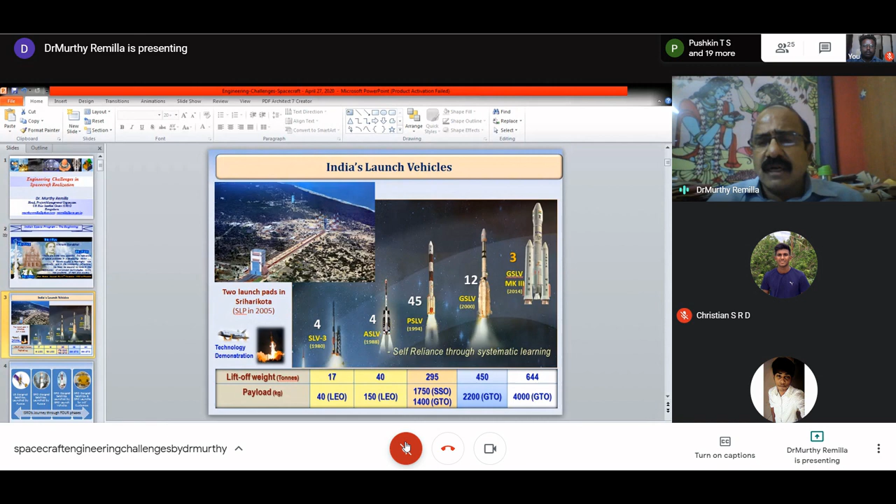Okay, then the initial slides I will go through quickly. As you are aware, there are different types of rockets for India. We initially started with a sounding rocket, then SLV, satellite launch vehicle, then augmented satellite launch vehicle, ASLV, subsequently PSLV, which most of you in the current generation are totally aware of, a very successful launch vehicle, the polar satellite launch vehicle, and then GSLV, the geosynchronous satellite launch vehicle, and the higher version of this is the GSLV Mark III, meant for carrying higher payloads to space.

If you briefly see all of ISRO's journey in one slide, initially we had the requirement of satellites and the requirement of launching them, but we didn't have either. So we made US-designed satellites and launched them using Russia. In the second phase, ISRO designed our own satellites but still launched them using Russia, because we didn't have a rocket at that time.

After that, we launched our own satellites made by us and launched by us — that is self-sufficiency. Subsequently, we started commercial operations where ISRO designed satellites and also launched satellites of other countries. We have launched more than 44 satellites for foreign countries so far using PSLV. So the initial program developed from the 1970s to beyond 2000.

Hello, yes sir, yes sir. Continue, continue. Is it audible? Yes.

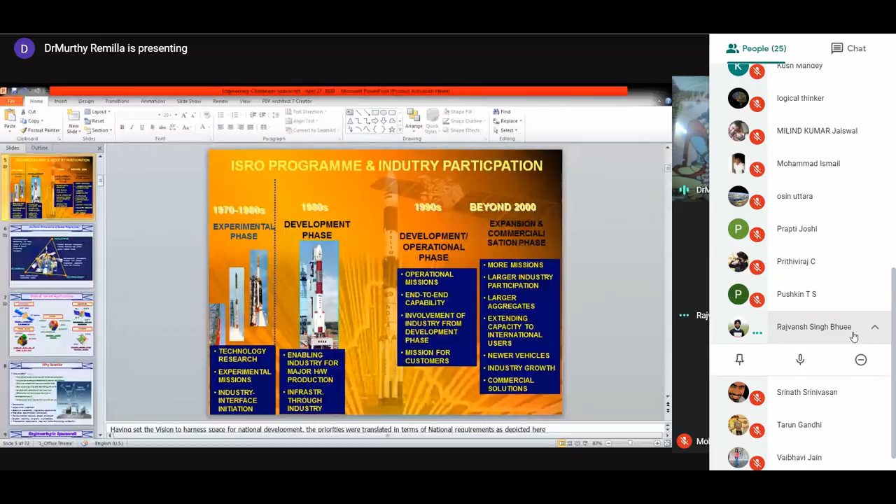Initially we had the experimental phase where we were learning, then the developmental phase in the 1980s where we developed systems, and after that in the 1990s, the operational phase. Developmental means just testing, working fine, you are happy. But operational means you should provide 24 by 7 services, whether in communications, remote sensing, or meteorological satellites. So in the 1990s we started that, and beyond 2000, in the last 20 years, we expanded our services and programs, and also started commercial operations and services to the international community and international customers.

So overall, if we see the Indian space program, it has multiple dimensions. One is the government, which needs satellite services for its particular purposes like socio-economic development, strategic technology capacity, and international cooperation. On the other side is the industry, which works with ISRO through technology transfer or on their own, developing satellites, rockets, or parts and supplying them to ISRO, sometimes directly as an industry supplier.

More importantly, there are also scientific payloads and scientific satellites. Sometimes they are not directly for serving the public, but to develop technologies for launch, technologies for observing stellar constellations, or for more famous missions like Chandrayaan, which most of you are aware of.

Other satellites in this series include Astrosat, for astronomical studies, and Aryabhatta, which was the first satellite. Very soon we are going to have one more satellite called XPoSat, an X-ray polarimetry measurement satellite. This will capture, catalogue, and preserve data on X-ray sources in space, their constellations, and their polarimetric zones for further studies by Indian satellites.

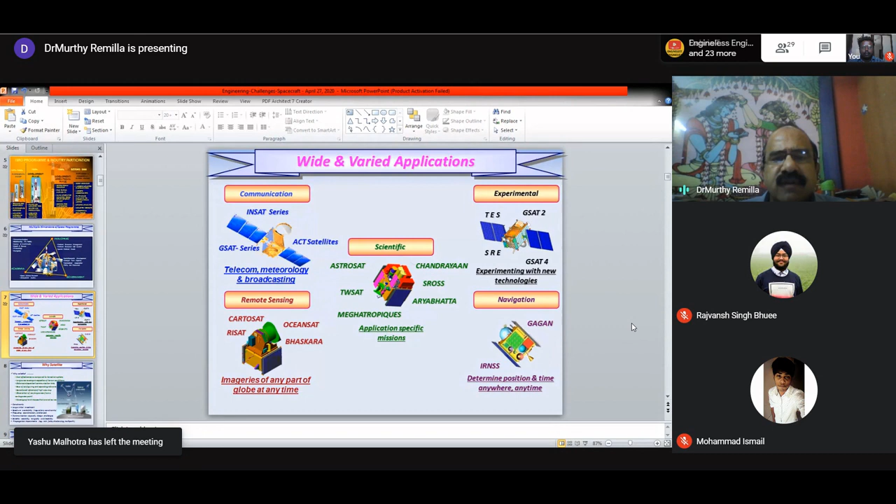So now that introduction is over. Most of you are aware again why a satellite is needed. Suppose you want to monitor India, a particular Indian border, or another city, you need some camera in space.

You cannot every time go and take pictures. That is why a satellite is cost effective compared to terrestrial systems. It is available 24 by 7 and doesn't have other demands. Once it is launched and properly designed, it will work for 5 years, 8 years, or sometimes 10 or 12 years also. Distant and long-distance communications and links are also possible through satellites.

Also, high accuracies are being achieved as designs and technologies increase year by year, so higher accuracies are possible, and we are developing precision and accuracy in the images provided.

Another advantage is, suppose you want to see the whole of India or at least half of India at a time, that is all possible through cameras because they have a viewpoint enabling them to view very large areas from a distance of say 600, 700, or 800 kilometers in case of a remote sensing satellite.

One satellite coming up this year is GISAT, which has a remote sensing camera in a geosynchronous satellite at 36,000 kilometers. Though the resolution is slightly lower, the advantage of that kind of satellite is we can continuously monitor India and its environment 24 by 7.

So, one minute. Can I proceed? Yes sir, yes sir, you can proceed. No, because there is no feedback. I just want to know whether it is going in a mono mode. Yes sir, yes sir. Because I have muted everyone, so that's why it is not responding. Okay, okay. You tell me if I have to increase or decrease the speed. No issue, everything is fine. Yeah, everything is fine, yes.

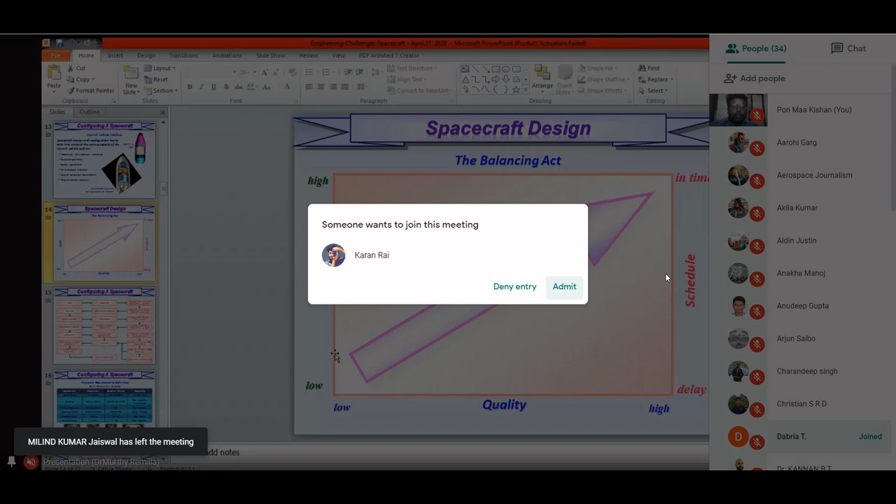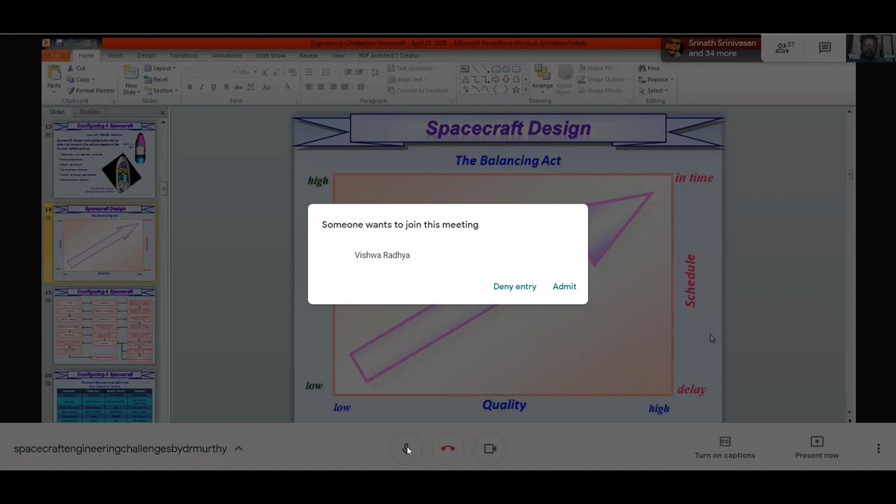So while designing the spacecraft, it is a very complex job. I told earlier why it is complex. Because you have to do a very balancing act of what is the timeline available to you, because the higher the time available, the better the design can be. And what is the money available with you, so what is the cost? Higher the cost available, or rather higher the resources or money, definitely it will take more time and more money. So you have to manage and take a balancing position between the schedule, the cost, and the quality.

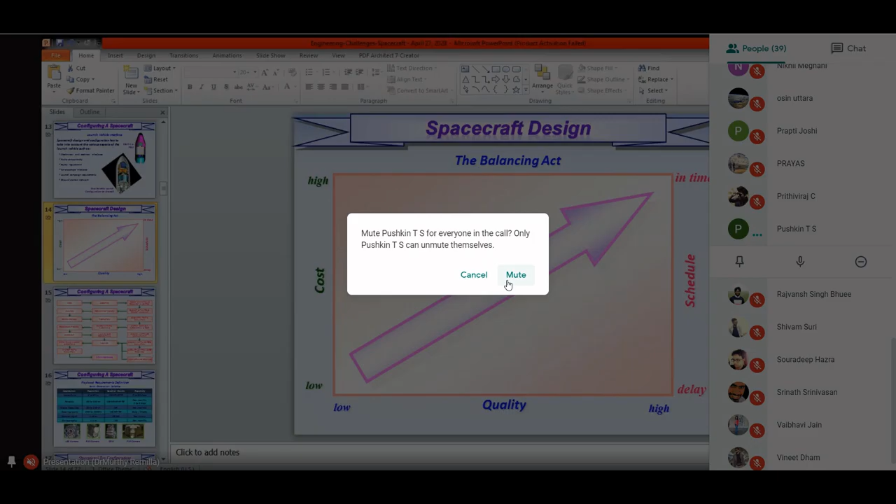Because you cannot build a satellite taking 10 years design time or development time with the best quality, that may not serve the purpose. At the same time, you cannot design a satellite with zero quality or very low quality, which will come at a low cost and at a faster timeline, but which will not serve the purpose.

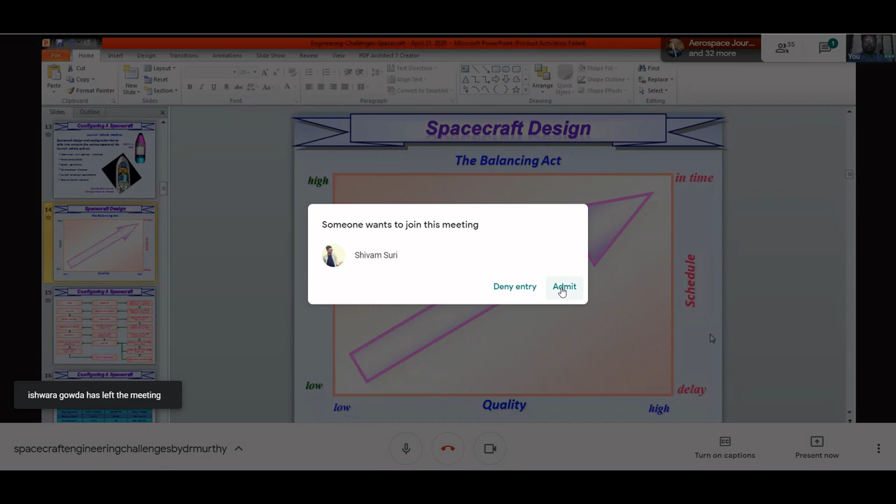So these are all the parameters, as I said in the previous slide. You have to take care of all the parameters into consideration and then decide and define what the satellite is, what timeline you are having, what money you want for that, and what level of quality you want to define and test.

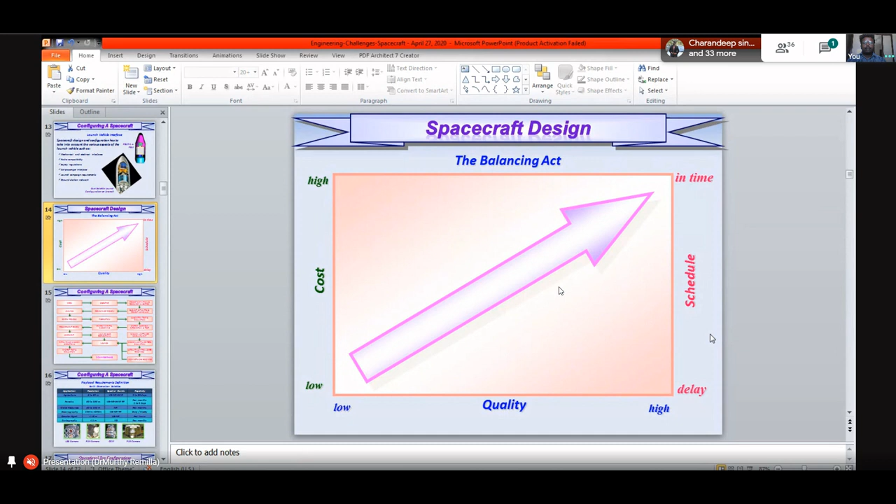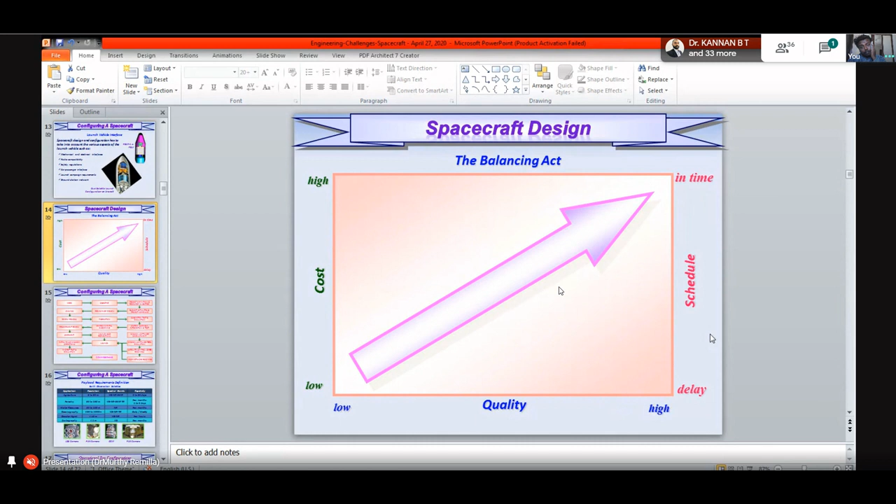So these are just some examples, not the end of it - there are many other models. For agricultural applications, like monitoring agricultural development on earth, what resolution is required? Around 5 to 50 meters. What visible bands are required? Visible, near infrared, and short wave infrared. What is the repetitivity? Ideally every day, or at least once in 2 to 30 days. For forestry, it's 50 to 150 meter resolution. Different specifications are required for water resources, oceanography, disaster management, and cartography. These are all the different configuration parameters for remote sensing satellites.

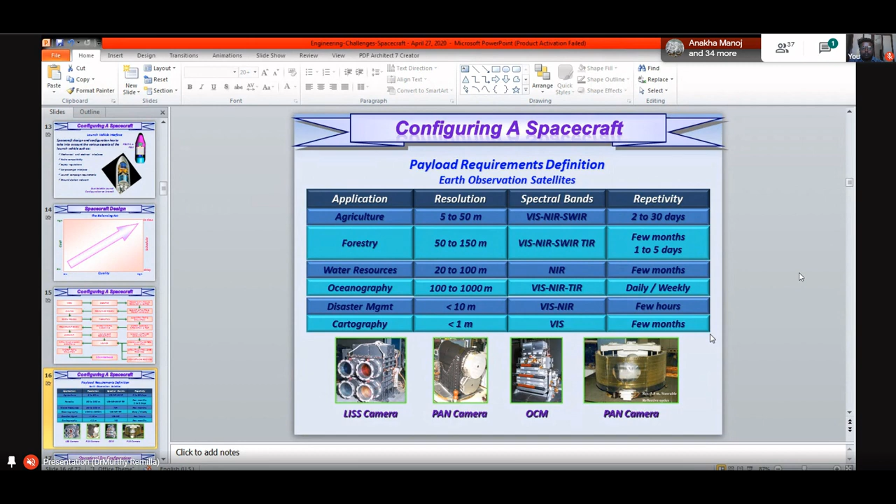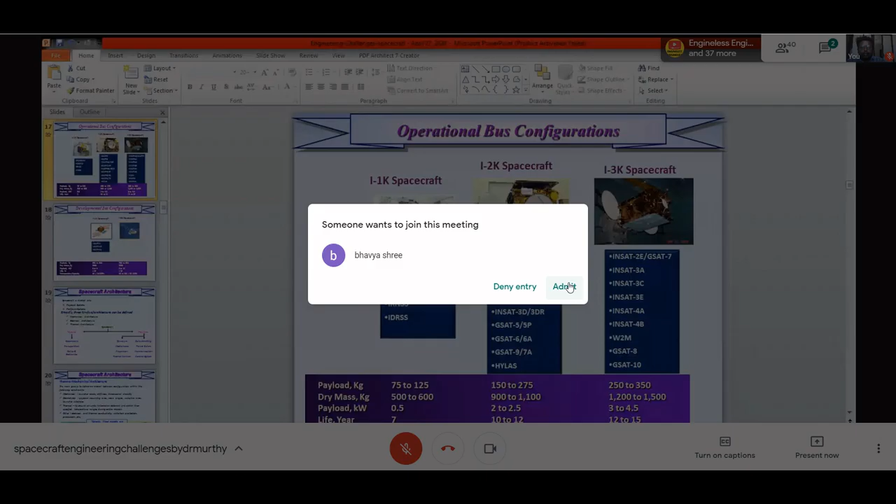Where you want a long life of the satellite, which needs larger propellant and bigger tanks, and also long duration payload operation, that requires a higher capacity bus system. So as previously seen with quality, time, and money - here also, the higher the bus capacity, the higher the payload that can be accommodated, and the better the system can be. But however, you have to again keep in mind the money, time, requirements, and resources available.

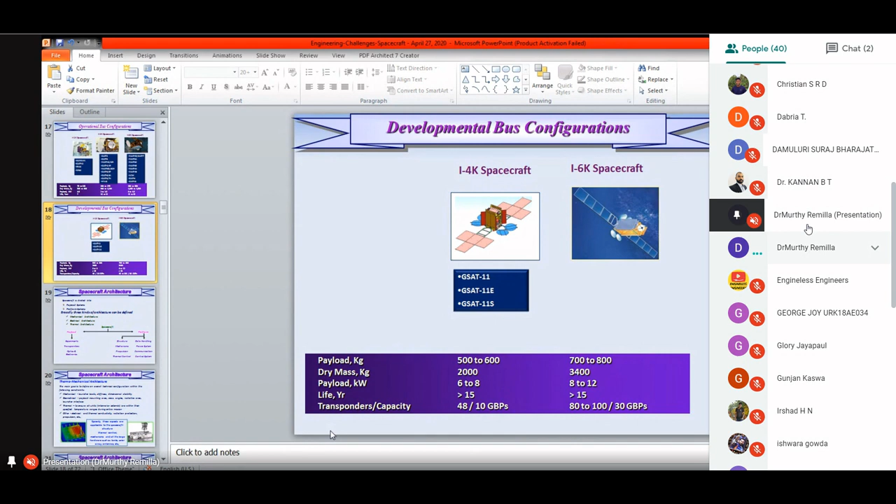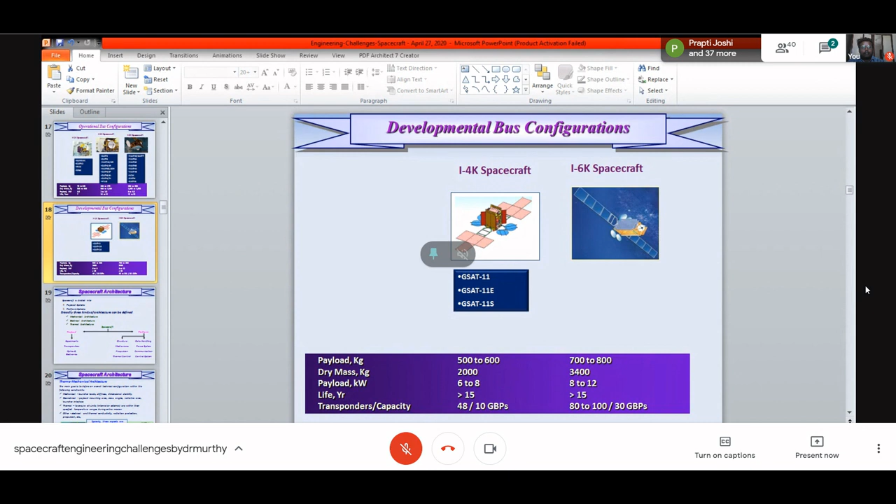Imagine you are building a house - you know how much time you have, how much money you have in hand, and then what is the building structure, whether you want multi floors or one floor or two floors, and whether you want an aesthetic look or a very quick and fast solution.

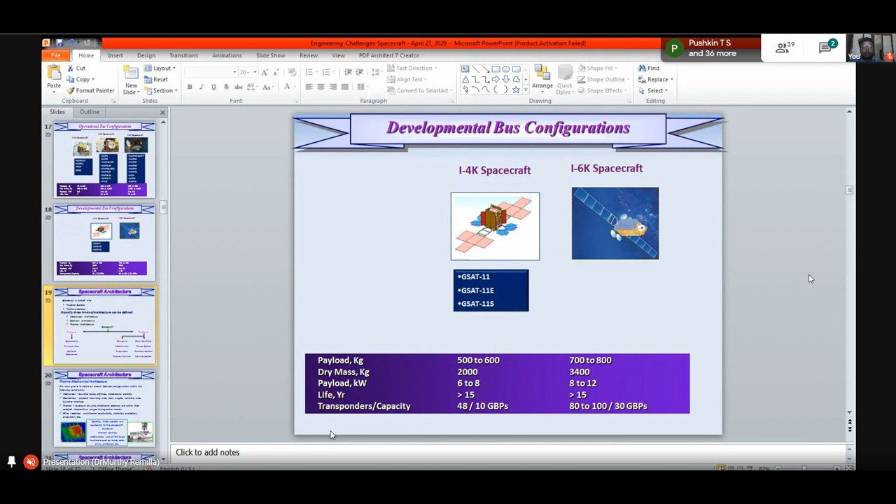Same logic applies here. What is the payload, what experiments you want to conduct, what are the applications, and for those applications what platforms are required, then what is the structure. Suppose you want to build a seven floor building, your foundation has to be different. Same way the structure, the mechanisms, the propulsion systems required, and the thermal control.

If you are building a house in India - South India, North India, near the Himalayas, or in a Russian continent - the thermal environment is different, so you need a different thermal control for that house. I'm just giving this as a general example.

Same way, data handling - what data is coming into the satellite, from ground stations or commanding, and what is the data outcome of the satellite? How do you handle that, in what band? And then what is the power requirement? Same way, communication and control system.

It is a very complex and dedicated job of controlling and monitoring so many parameters, keeping a balance, because everything is not done by the same person or group. One communication group should not develop an ultra modern communication system needing very high power, not planned or budgeted by the power system. Or both power and communication may have a perfectly matching system, but the basic structure or dimensions don't match the structural team's design - that is not allowed at all. It is a very complex system, but very well tightened coordination is required so there is no gap or miscommunication between different design teams.

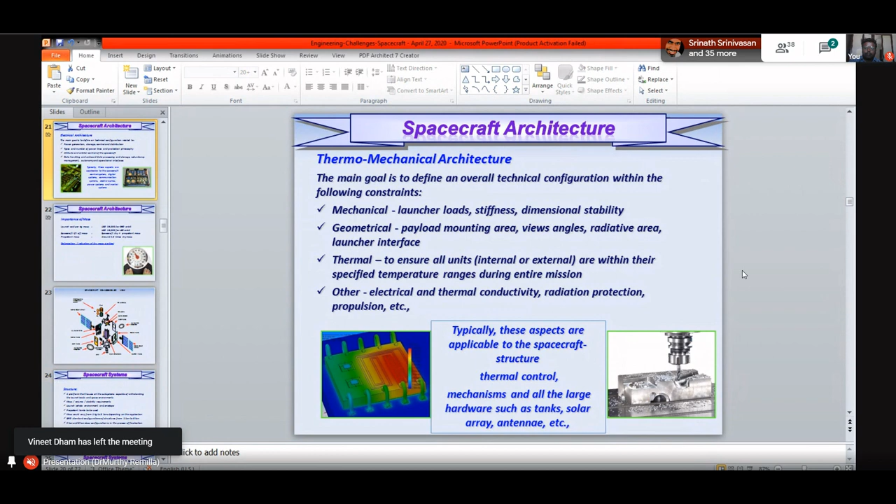Power is generated at the hydel power unit, and then after that it comes to the stations, then substations, then to our local area, and then finally to our home. Same way different power lines are there. So what are the power lines, what is the protection, and in case one system malfunctions, how does it not affect or damage the other systems, like our circuit breakers or MCBs in our house. So how do you take care of the protection, power lines protection and other subsystems protection?

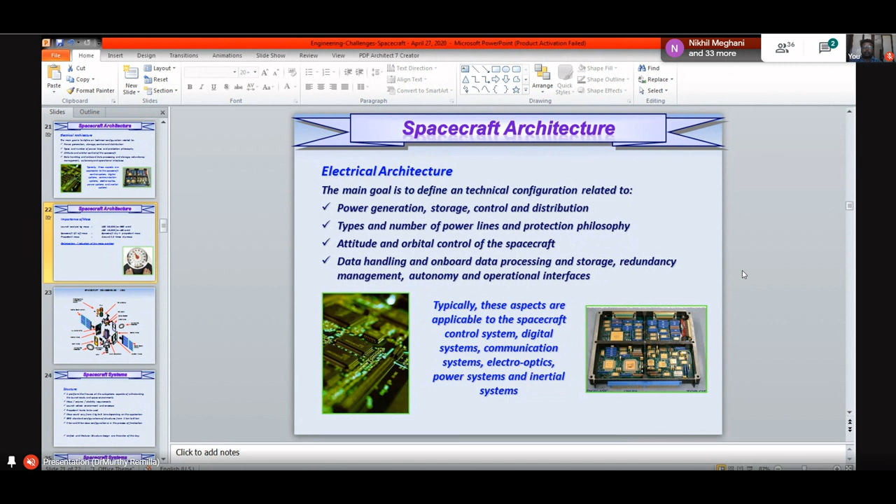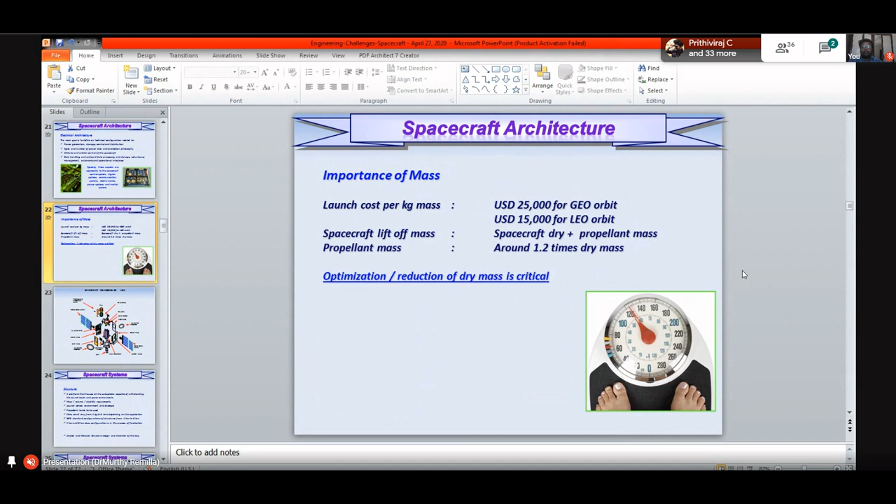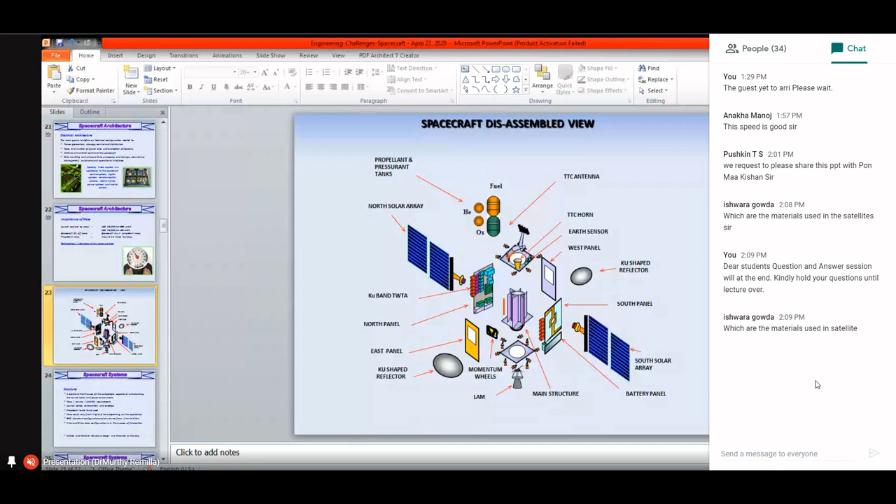And then after that, once the components are used and PCB is populated, the PCB is also tested. After the PCB, the subsystem is tested. After that, the system, let us say control system, power system, communication system, everything is tested at the system level.

Then finally, everything is brought together into a very controlled environment that is called a clean room, where it is again assembled one after the other. First, the basic structure, as you see, the internal or this very central portion structure is there. Then over that, around that, the whole spacecraft gets built exactly like a house is built. Everything is built, and all the sub assemblies and modules are added together, and then everything is parallelly monitored and controlled through the checkout system.

And finally the whole spacecraft goes through testing and then simulation as if it is in the space environment. It goes through the thermovac test, that is the thermal and vacuum conditions of the spacecraft in its intended orbit, whether it is remote sensing, communication or navigation satellite. So what are the thermal conditions in that orbit? Those conditions are simulated, and it goes through that phase of testing, and after that it comes out, and any correction mechanisms, if required, are carried forward.

Then this is the structure, as I said, this is the basic platform. You can think of it like a foundation for the building, which you have to plan according to the building that you want to build. Similarly, what are the mass, volume, and stability requirements, and accordingly the structure is chosen, the structure material, its dimensions, its finishing, everything is defined. So finally, whether it is a unified or modular structure design, that is one modular system where it will have a base structure and then all the other modules can come one by one and get assembled.

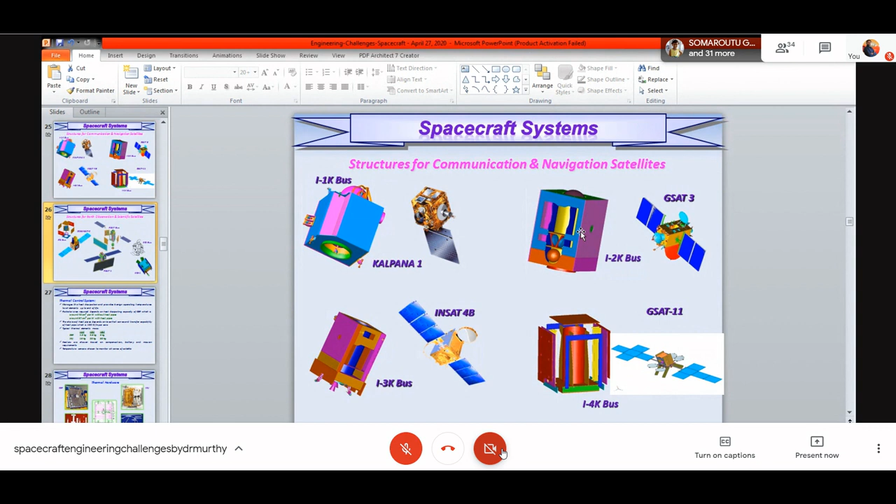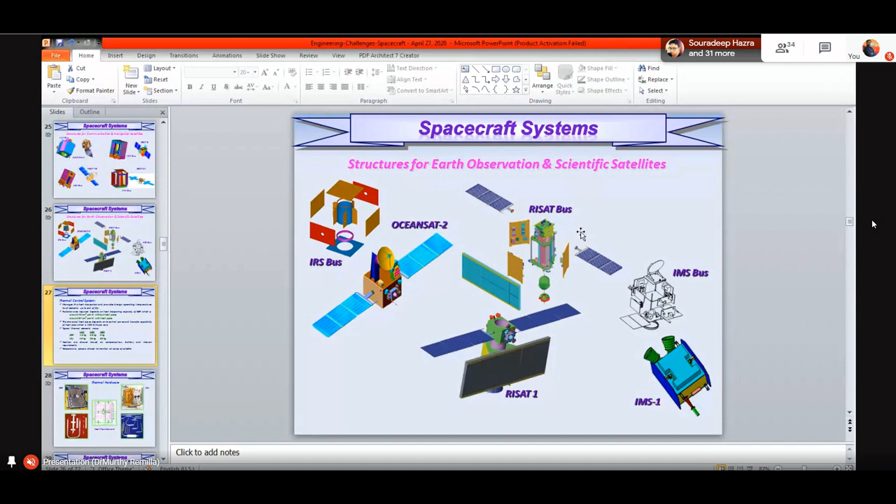So where is the engineering challenge in this? Now students, you have to note down some of the thermal parameters or thermal concepts when you are learning engineering. You may be thinking of it just from the examination point of view, but suppose tomorrow you get a chance to work in such a system, you have to design a system and anticipate its measurements, see what the heat dissipation is, what heat pipe we have to use, how much temperature it will maintain, and at the same time it cannot be overweight. So how do you meet all these parameters within the given constraints? It is a very balanced act, it is a rope walk.

It is a rope walk for each design team because there are so many parameters and constraints. What temperature sensors should be chosen to monitor different zones of the satellite, and what correction mechanisms need to be taken care of? Whatever concepts you're reading today, whether thermal systems, engineering drawing, power systems, or communications with different types of antennas, their power and gain, all these parameters are not just for examination, but you have to remember and apply them in the field.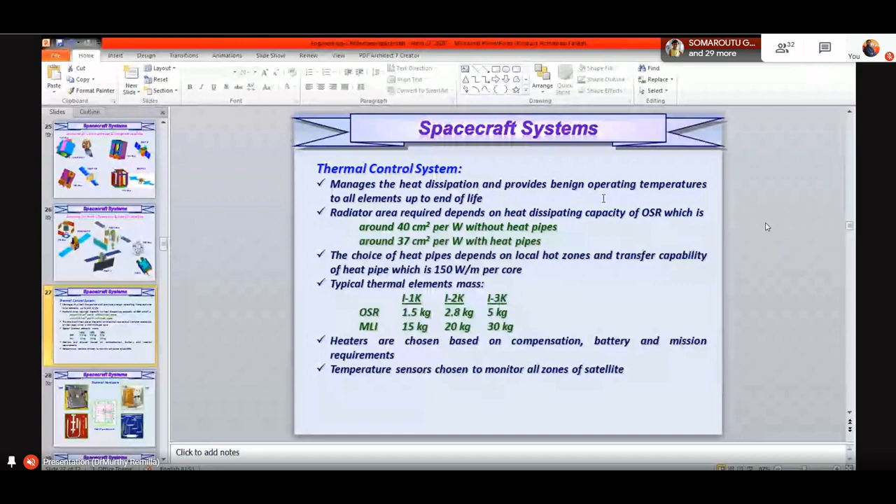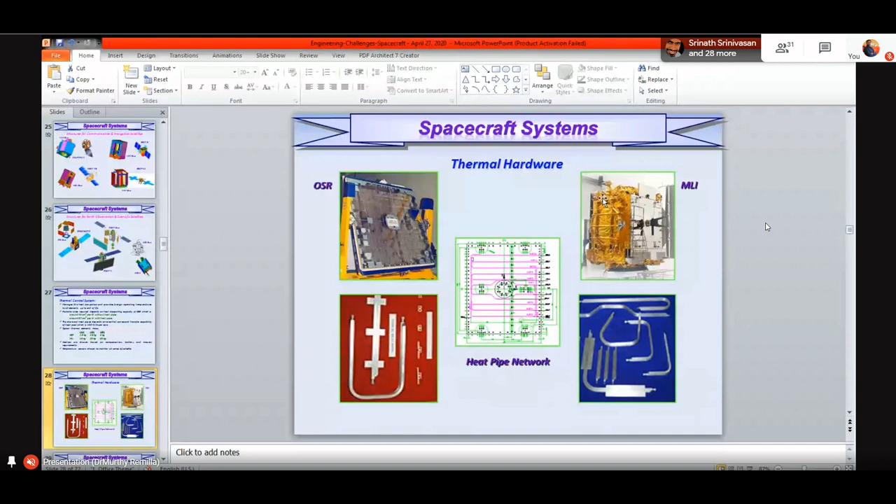On the satellite, I've shown it earlier with the solar arrays deployed. But at the time of launch, it will be in a stowed condition, with the solar panels stowed and everything sitting like a baby in the mother's womb. After launch, the solar arrays have to open up on both sides, then the reflectors and antennas open up, then the radiator panels open up, and the thruster assemblies. These are all the different deployment mechanisms designed into the spacecraft.

Every system and every subsystem has to be thoroughly tested at the subsystem level, at the system level, and again at the integrated satellite level.

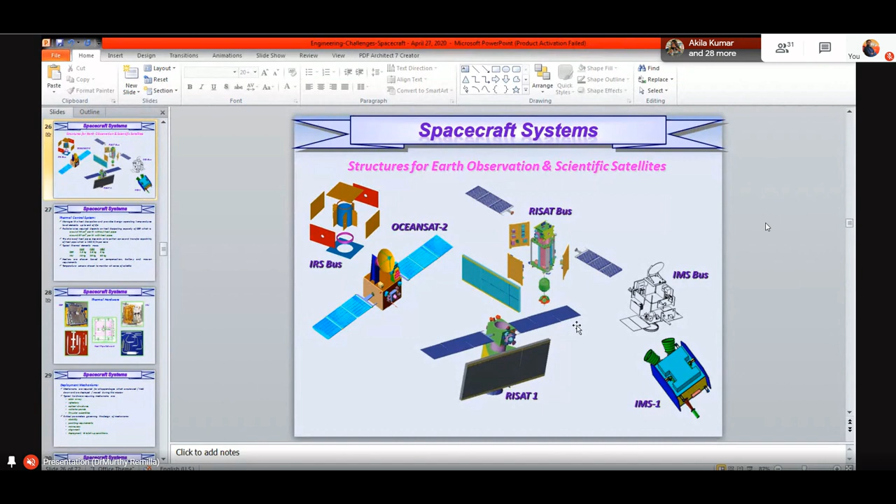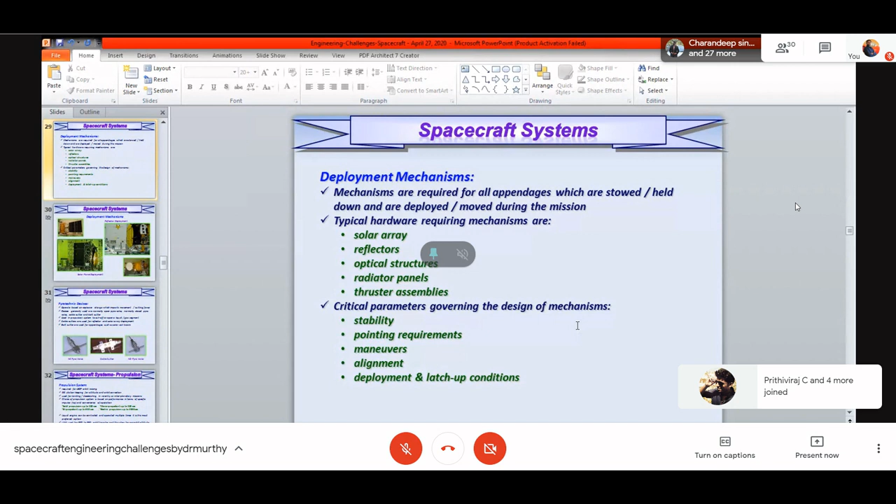What mechanical engineers have to keep in mind is the stability and pointing requirements. Suppose you want to tilt the satellite by 2 degrees - it cannot take half an hour when you want to tilt it to monitor a live incident within 2 minutes or 2 seconds. So pointing requirements have to be met, along with the number and kind of maneuvers, alignments, deployment, and latch-up conditions - all well thought out, designed, and tested.

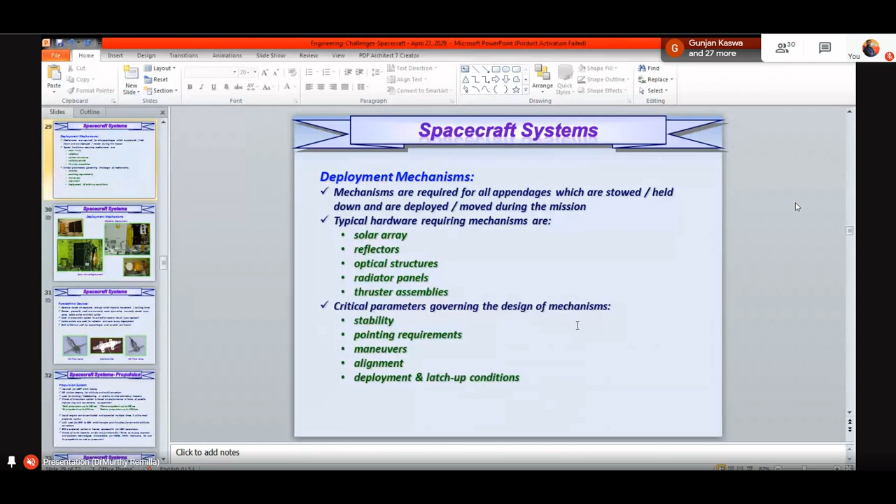As I keep repeating: first is thinking and visualizing what is required, second is developing and designing what is required, and third and most important is testing, verification, and validation, so that it meets all the requirements and specifications.

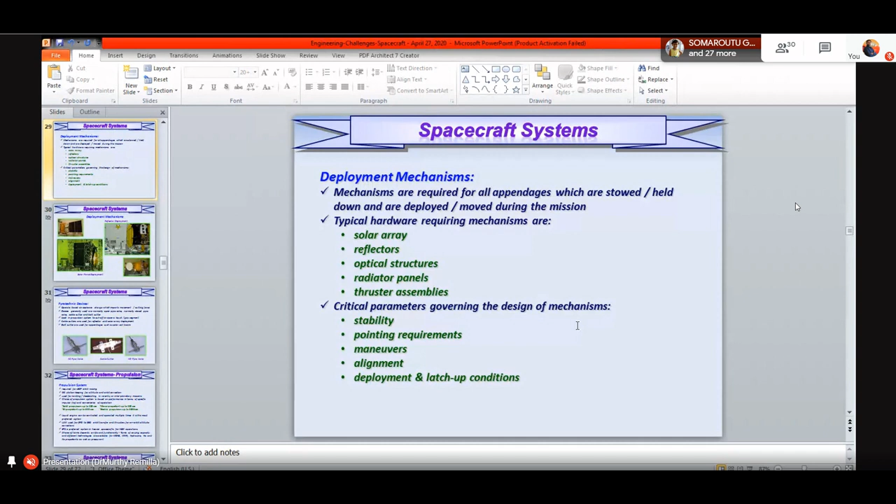Here's a simple day-to-day example: suppose you're opening a door, how gently or harshly you open it. If opened very harshly, it has a ripple effect and repercussions, or by bad luck, if someone is coming from the other side, their face is knocked off. Similarly, if the satellite's solar arrays open up in a jerky mode, the whole spacecraft will experience a jerk. So the spacecraft deployment mechanism has to be very smooth.

That's why even a simple latch developed by an industry or an individual engineer matters - no single person can develop a full satellite. Even one engineer can be proud of making a sophisticated deployment mechanism, maybe a simple hinge or latch mechanism that is light in weight, sturdy in operation, and has a long operational life. That is how the pride of individual teams and engineers comes together, manifesting in the development of a big and beautiful satellite.

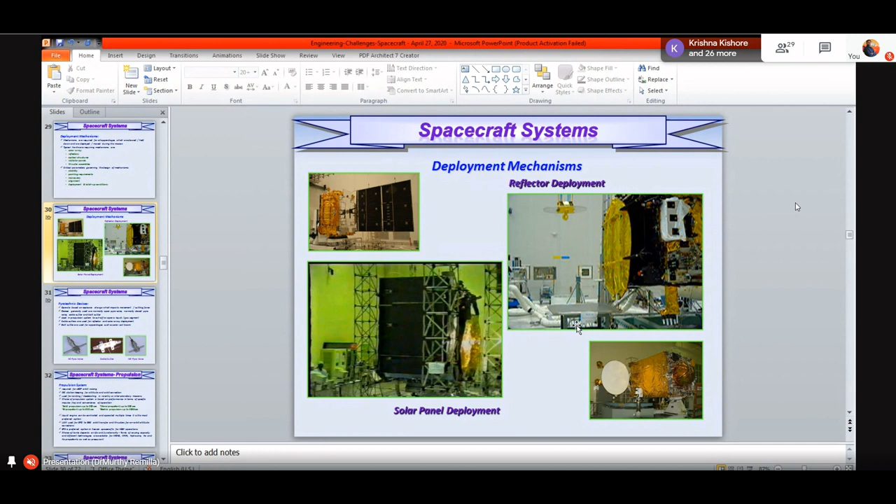Same way here also we need propulsion to make the initial phase operations, because after the launch till that is declared into an operational phase, you need the propellant to make adjustments in the orientation or visibility, etc. And then what are the different firing mechanisms into that, and other parameters.

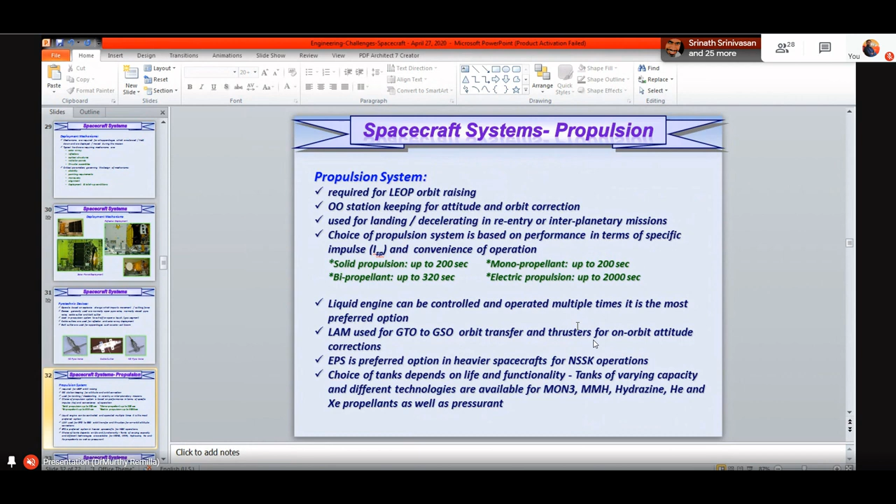Next comes the important thing of power systems, which you are aware of. The simplest thing to understand is your mobile, where actually an analogy is applicable here. Earlier, very large and bulky mobiles were there with very small power capacity. Today, as the day is progressing, we are getting high capacity power systems in very slim and sleek mobiles. Same way here also the requirement is how do you give more power with less weight for a long duration.

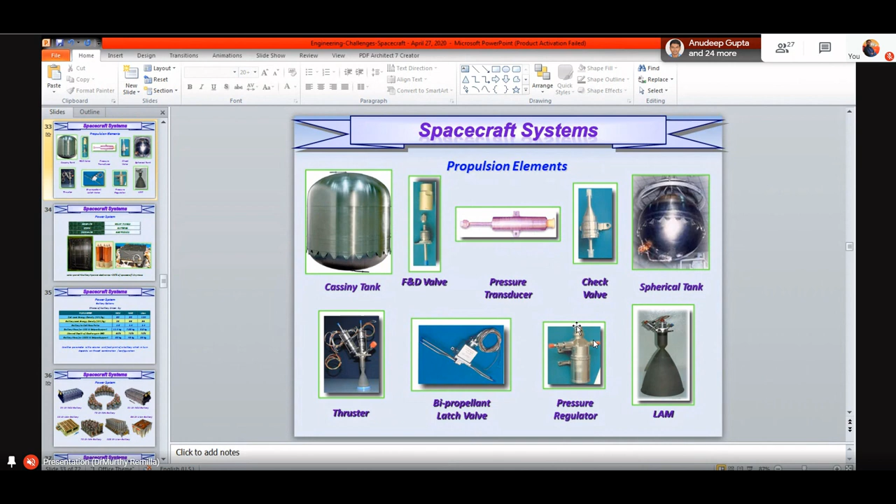For that, different technologies and developments are happening day by day. And here the power systems, the electrical engineers and others who join either ISRO or other associations or other industries, they can take care how they come up with a new design for a payload or for a power system which will give a higher life for the spacecraft.

So these are different cell models: nickel cadmium, nickel hydrogen, and lithium ion batteries. And yesterday only some other news came that some more models are coming. So again, as I said, there is no fixed rule that this only is the good thing or this is a bad thing. Based on the requirements of the spacecraft and its design, architecture, and money or resources available, different parameters have to be kept in mind.

Then an optimum battery combination has to be selected. These are all the different models of the battery arrays, that is 24 ampere hour nickel cadmium battery, then nickel hydrogen, then nickel cadmium one more again. The bottom one is a 10 ampere hour only. So based on the ampere rating required and what subsystems it has to drive or serve, the power systems have to be selected.

Then once the power is generated, then how do you manage the power which is generated? How do you store it? And then how do you distribute it? This example we have seen like our power generation in the power generation units on the earth also.

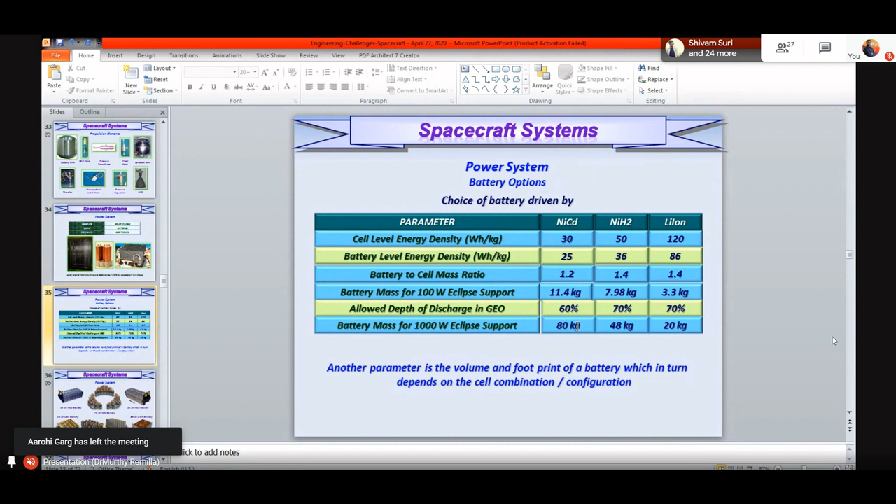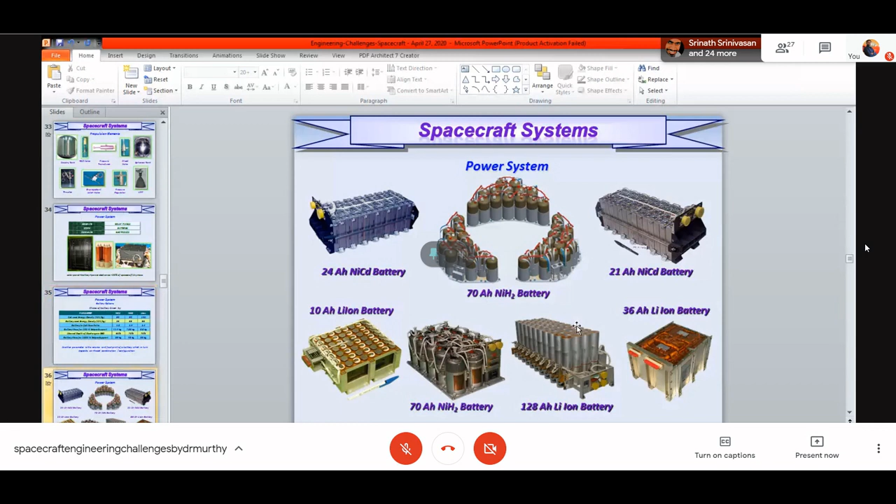Then what are the digital systems? This is for the electronics and microelectronics and digital systems students, where actually what are all the health monitoring parameters, then what are the commands and controls to be given, and then what is the data management. So these three things we have seen earlier.

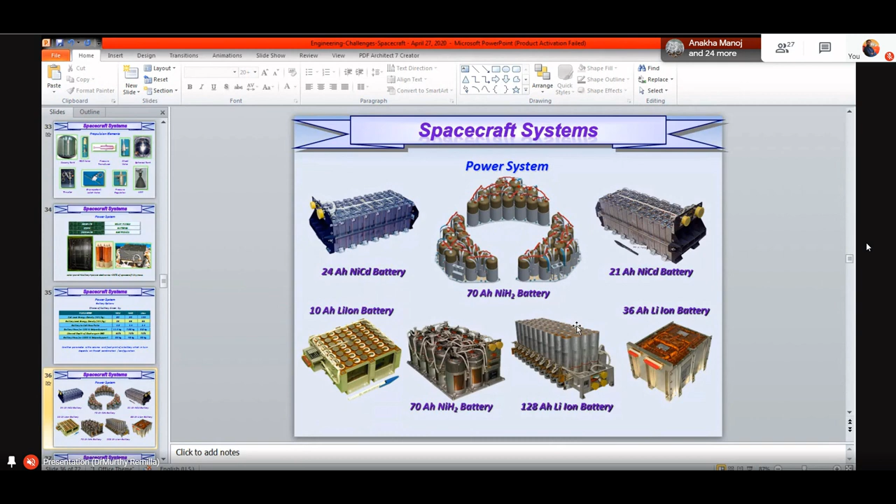So what is the data size, then at what frequency it is coming, then how do you take it to the ground station. Suppose if you are using a remote sensing satellite, it is visible over a ground station based on the antenna, maybe 3, 5, 8, or at most 14 minutes. So in the 14 minutes or in the 4 minutes, you have to downlink the maximum payload data.

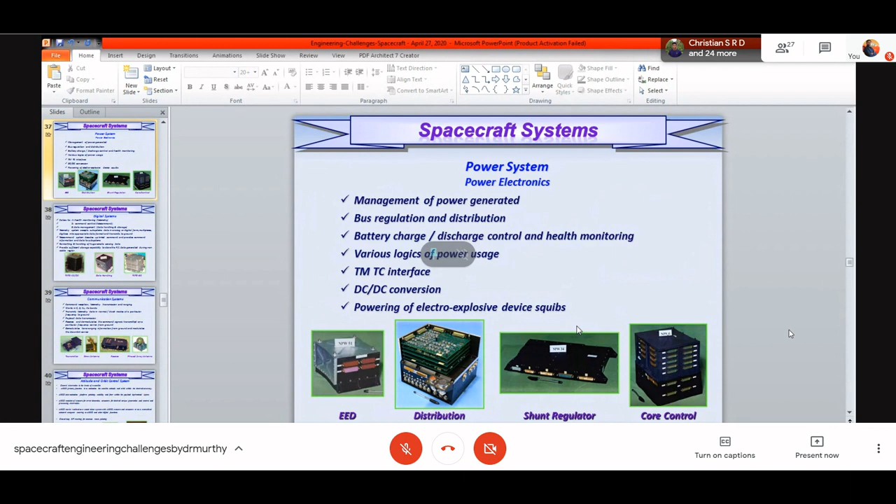So what is the payload data downlink rate? What is required? For that, what are the digital systems to be designed, and then what are the data handling systems? Then how do you make them, and then how do you see that they are all interleaved and coming in a minimum bandwidth to the ground station, and after that they are again reconstructed, and also building the security mechanisms.

Then communication systems we have seen, they work in the C band, S band, KU band, Ka band, etc. So what are the antenna types which are required? Is it a remote sensing antenna which is downlinking the data for a particular station in a particular direction at a time? Or is it a remote communication satellite which is giving the signals in multiple directions?

Or is it a TV signal broadcasting? Or is it a navigation system? So, based on different applications, different antennas are used. Here, communication engineers will be reading the antenna, the gain measurements, then the power requirements, and then the noise and temperatures, etc.

So all those parameters are very much required in the application of communication. Why did I name this presentation engineering challenges? Today as students you may be studying power systems, communication engineering, power engineering, or thermal engineering, etc.

But in the case of a satellite, everything is a challenge. The challenge is making the best optimum satellite, optimum subsystem, communication system or power system, also in discussion or synchronization with the others. I may make the best communication system in the world, but if I don't know about others, that will not serve the purpose. It has to be the best communication system within the given parameters or boundaries. Then the next one is the attitude and orbit control system.

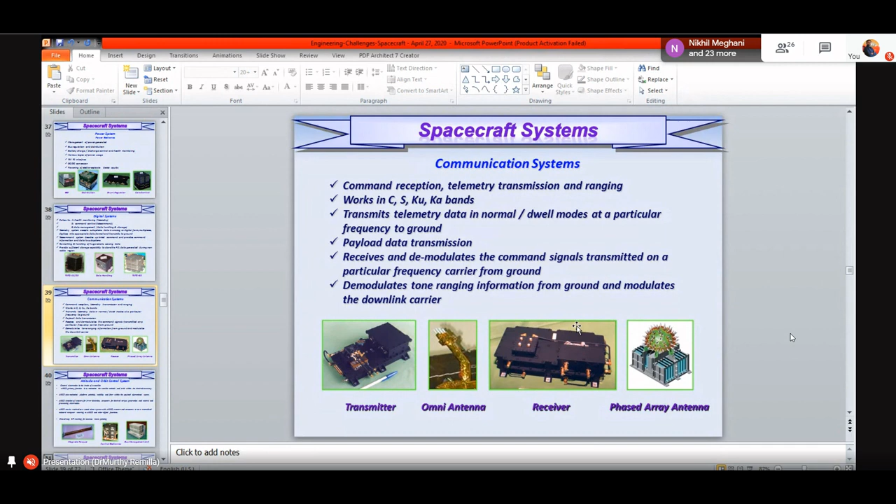Then there are other inertial systems like the attitude referencing system, used for maintaining the orbit and attitude control of the satellite, which sometimes uses wheels or a solar array drive mechanism, SADM.

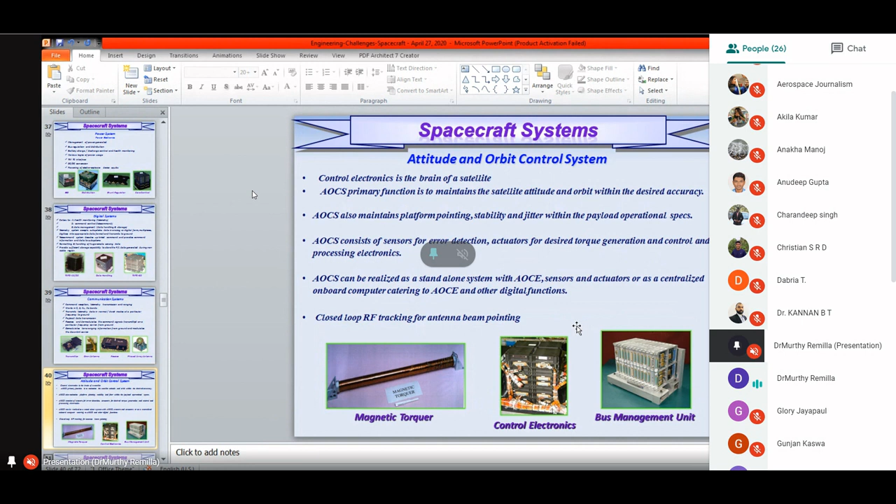So where will we be using the solar array? Suppose if the solar arrays are there, whether it's sun eclipse time or sun pointing time, what is the angle of the solar array with reference to the spacecraft for getting maximum sunlight and maximum charging of the internal batteries?

These are all the different attitude and orbit monitoring and control subsystems: flywheel assembly, wheel and electronics, then slip rings and brush blocks, etc. We will cover these probably later when time permits.

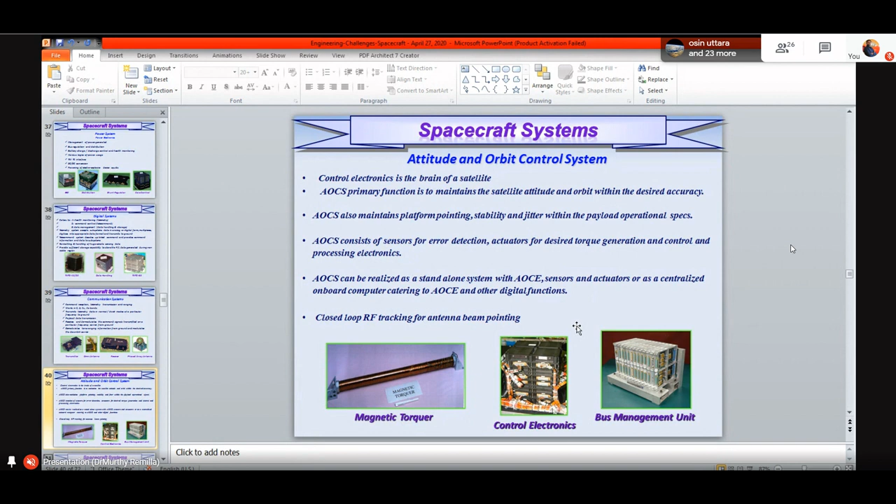Once all these subsystems are designed individually and tested, the most important thing is the marriage of all the subsystems, happening in this phase called assembly, integration and testing, where all the mechanical integration happens, all the building blocks are brought together and built together.

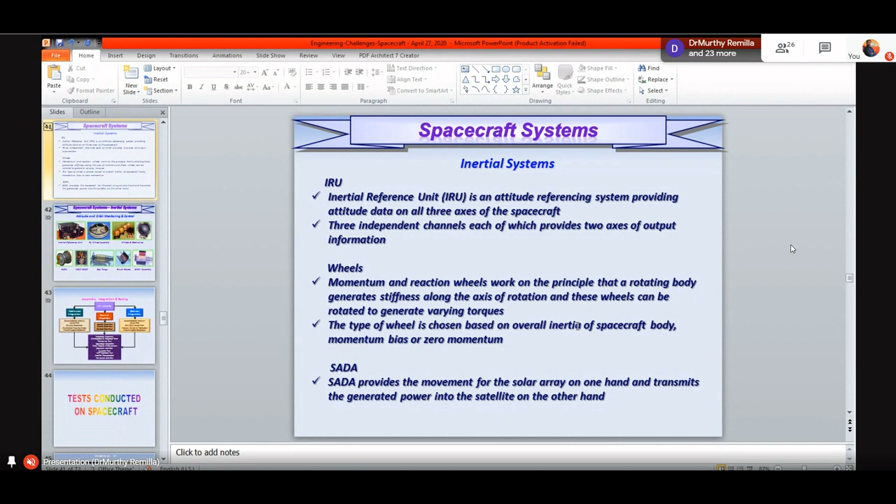Then the checkout: how the systems function on the ground is tested, then electrically what is the accommodation analysis, the layout plan, whether everything is taken into the system, and what are the interferences. Then what is the inter-system disturbance if any, because one system may be good individually, but when put together they may have some other interferences.

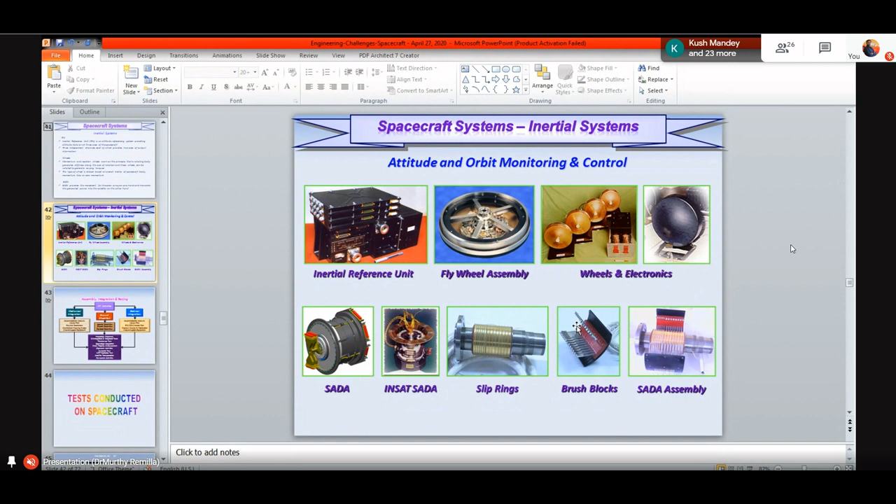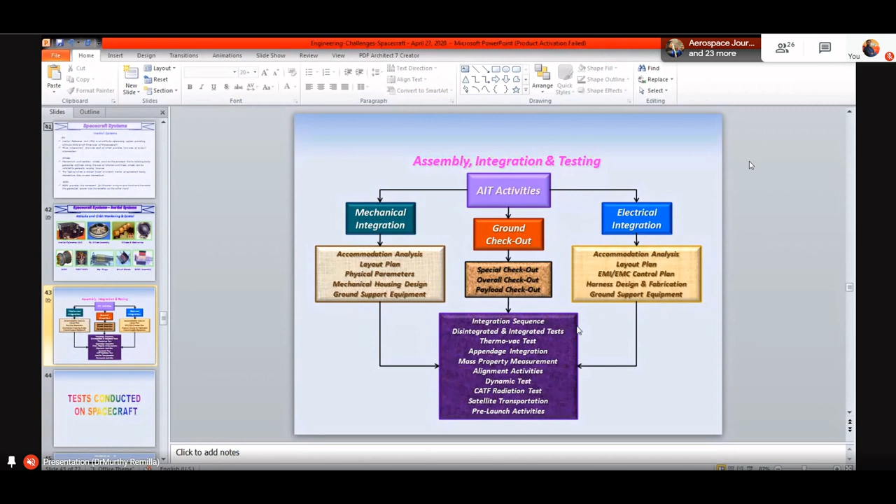Then this is a thermovac test. As said earlier, the thermal and vacuum conditions of the spacecraft orbit are simulated in that big chamber, whether 4 meter or 6 meter diameter, and the spacecraft is lowered into that environment, the lid is covered, and it stays there for 7, 14, or 20 days based on the design and our heritage. If it's well designed and heritage is already available, say you're launching the fifth satellite, you may conduct these tests for a lesser time.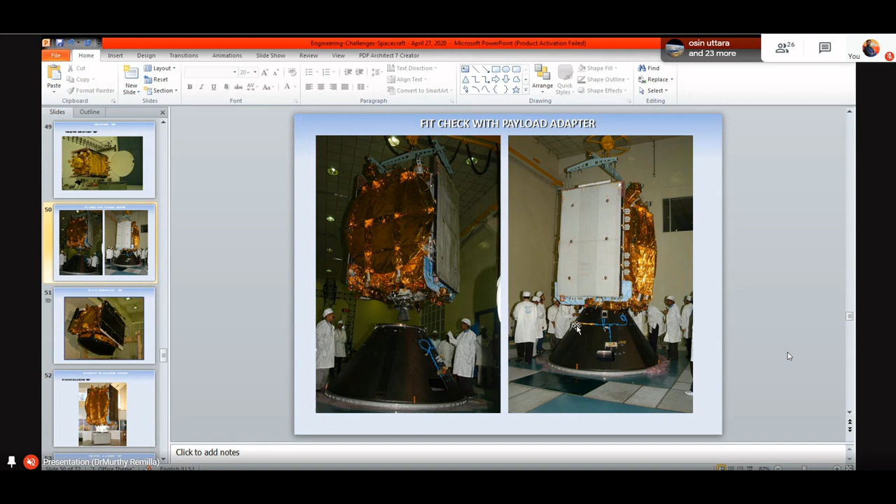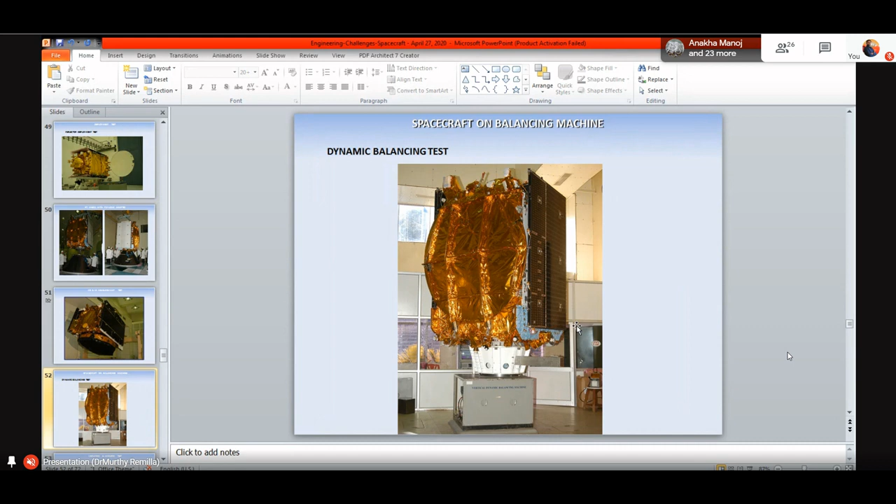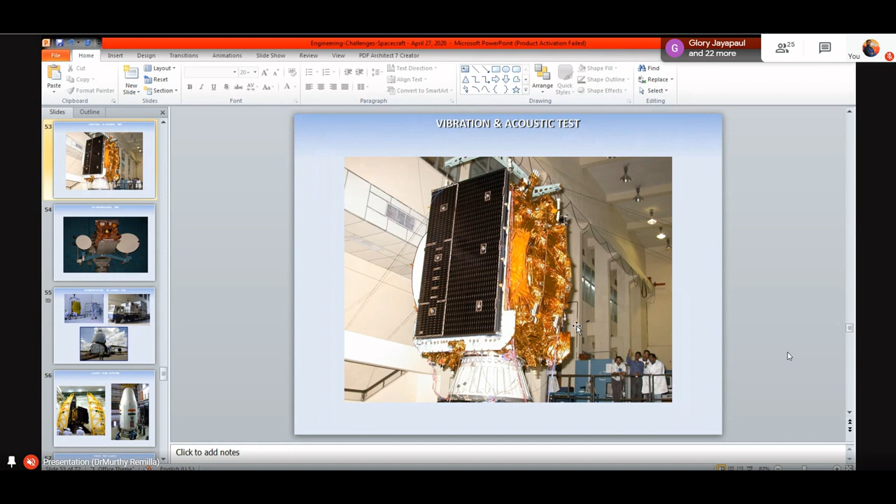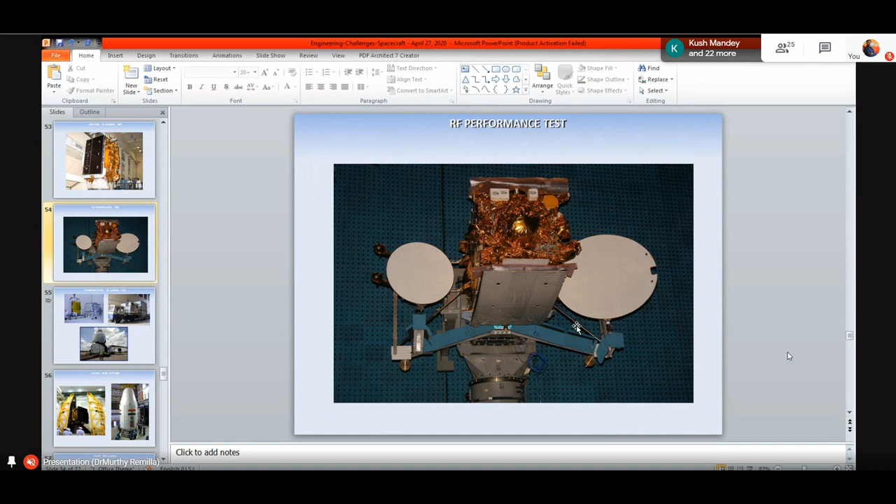Behind this, project management comes from the beginning. Frankly, they don't directly do anything on their own or by their hands, but they definitely have total management of what is happening throughout the center, throughout the different industries, and between the centers and the industries.

How everything is planned, how everything is designed, and then how everything is tested, and in case of some design requirements, obsolescence, or other failures, what changes may be required. If some change is done in one system, how that is conveyed to the other related system, so that it doesn't live in the old world of some other old design parameters.

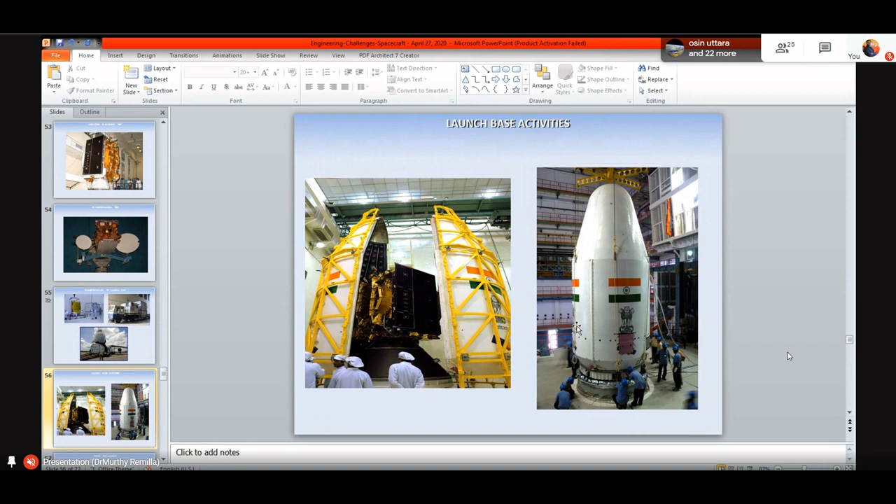So every change management is important, and after that, how do you account for the total configuration? You should have master control on the configuration: what is originally planned, what tests are conducted, what changes happened in between, how they are communicated to others, how they are accommodated by others, and finally everybody is back to the same design philosophy or design specifications.

For this, different review mechanisms are there. There is a baseline design review at the initial design level. Then there is a materials review board which will review all the materials, including components, chemicals, paints, or any other materials used.

Then there is the preliminary design review, once it comes to a basic or preliminary stage. Then the critical design review continues. After that, we have the subsystem review. Every subsystem goes through the review mechanism, where the subsystem test results are discussed, and if there are any observations or deviations, they may be repeated or correction mechanisms have to be taken care of.

Sometimes some unexpected errors, deviations, or failures may come. How do you take care of those things? That is reviewed by the emergency review board.

And the pre-shipment review, after all the satellite tests are completed and the fully integrated satellite test is completed, happens at the highest level, which will review the design philosophy onwards, how the test parameters and subsystems are meeting all the parameters, and then it will be cleared for shipment.

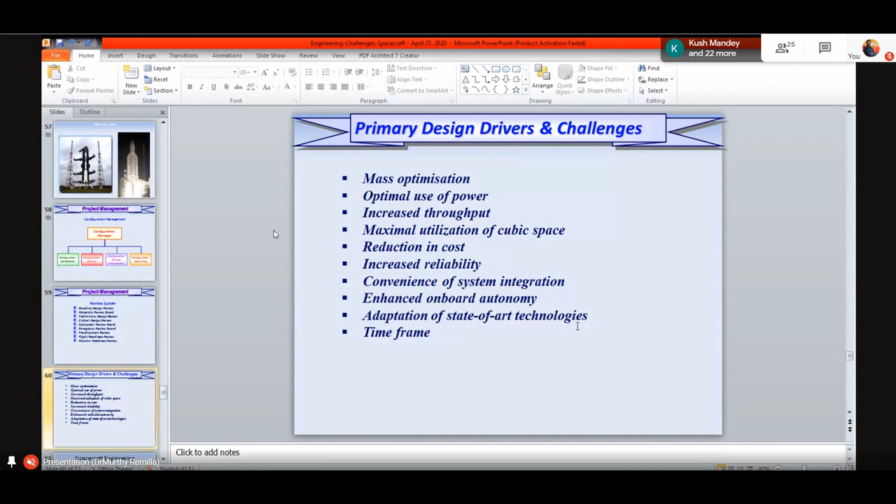So that brings to a close of my presentation. I think we have taken 5 minutes more. No issue, sir. No issue.